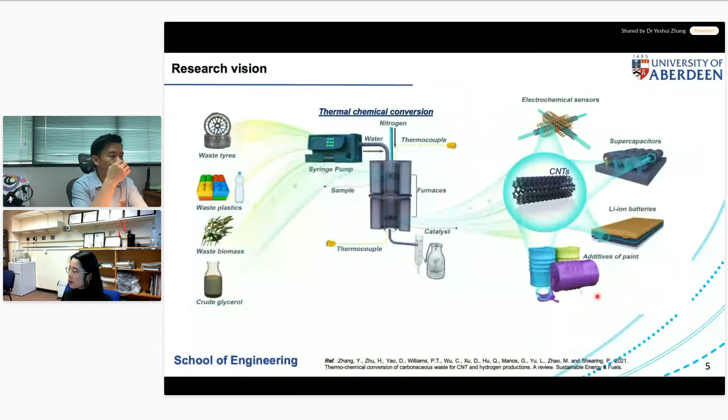Now I'm going to start with some of my research. In general, I do waste management. I handle all sorts of organic waste: tyres, plastics, biomass, crude glycerol from the biodiesel industry. Through the thermochemical conversion process, I produce carbon nanomaterials, for example, and most of the time I target hydrogen-rich syngas. I develop the process and also the reactor.

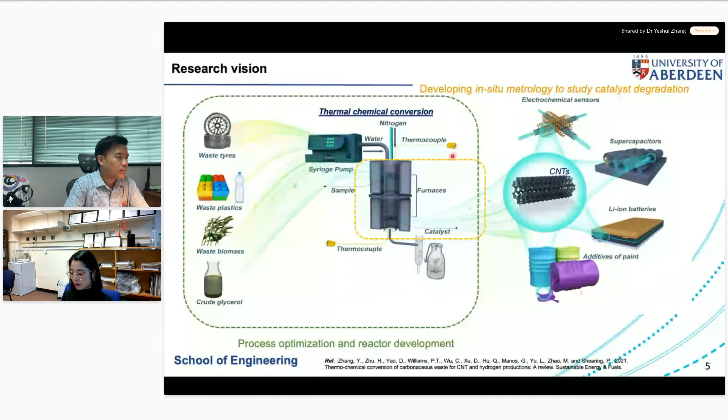Meanwhile, one of my favorite parts of my research is to develop in situ metrology to study catalyst degradation and other sorts of in situ metrology development. That's the main topic for today. I also seek applications for the products I produce from the waste feedstock, particularly the multi-walled carbon nanotubes. I try to use them, for example, for the anode side of lithium-ion batteries or as conductive additives for both sides of lithium-ion batteries.

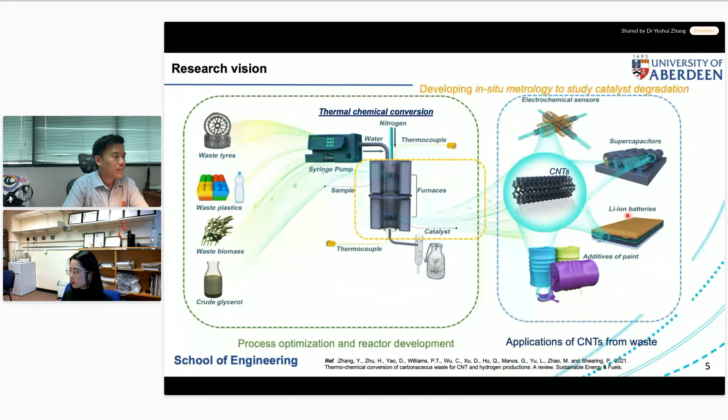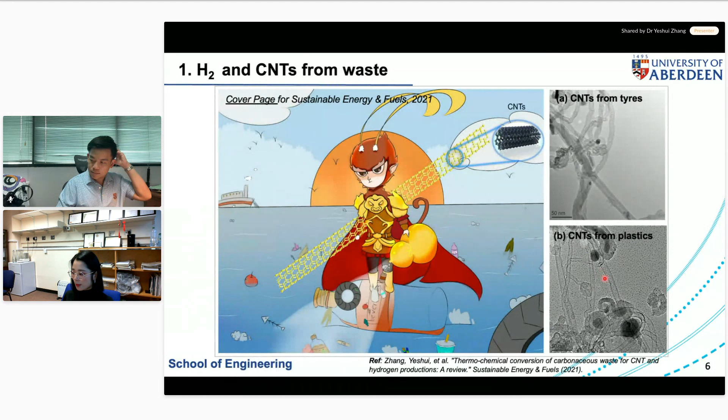The research relevant to this subtopic is funded by the European Union Horizon Europe program and also UKRI, which is a UK funder. The whole idea for this hydrogen production from waste project, the acronym is HyWay. We are targeting to commercialize this project.

That's why we do not only look at the process optimization, we also look at the potential economic benefits for commercializing this process, and try to minimize the cost and the investment, and meanwhile maximize the profits from this process to convert these problematic waste polymers into high value products, including hydrogen and also carbon nanotubes.

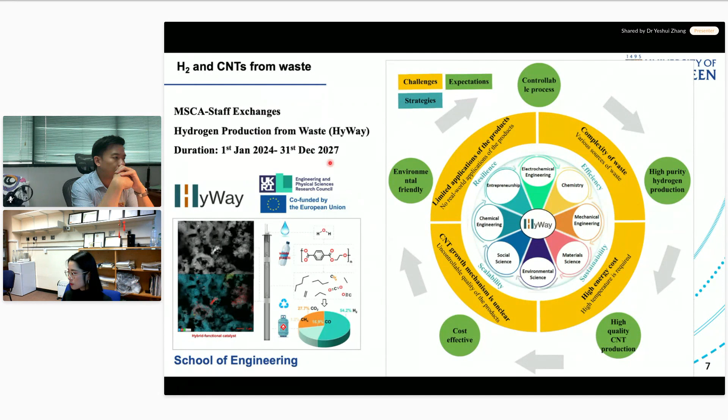As I just mentioned, I started this project during my PhD from 2014 at the University of Aberdeen. I have tried all sorts of process optimization, including all parameters and material development for the catalyst design, and also the modification of the reactor. I'm not going to go into the details, and all of this work has been published. If you're interested, you could go through the details of these process optimization results.

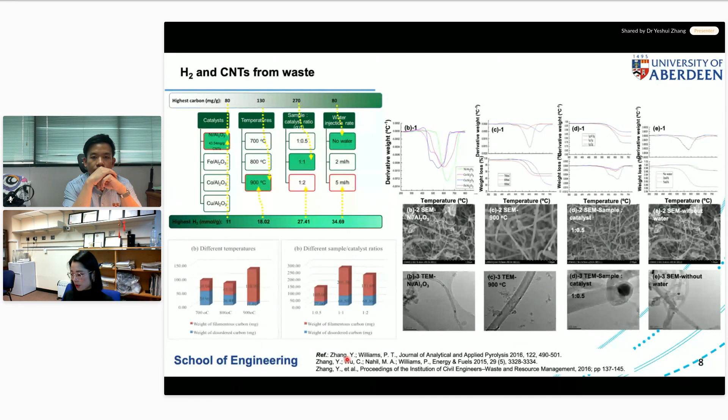What I can confirm is we can definitely produce high quality carbon nanotubes. Meanwhile, we can try to maximize the hydrogen-rich syngas production in the same process. One of the challenges for commercializing this project will be the carbon nanotube growth mechanism. Why? In general, through the thermochemical conversion process we have to use a catalyst, and carbon deposition on the surface of the catalyst is one of the major issues that degrades the catalyst.

So researchers try to either develop a type of catalyst that is resistant to carbon formation, or understand how this carbon is formed on the catalyst. Meanwhile, we can convert this problematic carbon into high value carbon nanotubes. That was my aim. So I try to investigate the growth mechanism from this process and see how these carbon nanotubes form.

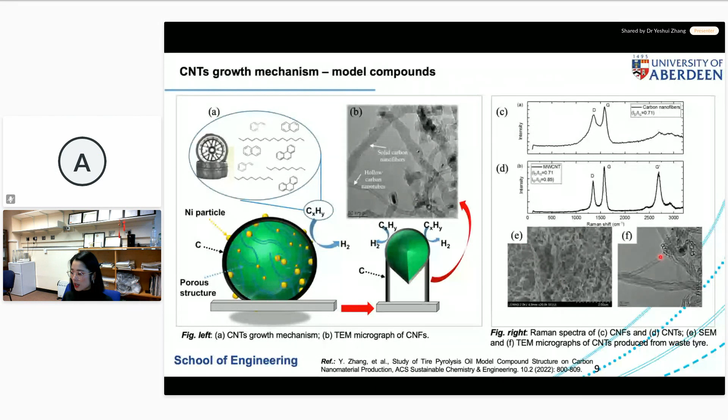On the right-hand side, we use Raman spectroscopy to confirm the quality of the CNTs produced from this process. I'm sure some of you have been using Raman spectroscopy. It's very powerful equipment to help us identify amorphous carbon and graphitic carbon in the mixture of these samples. And we use scanning electron microscopy, like figure E here, and transmission electron microscopy to confirm the production and the quality of the CNTs we produce.

Regarding the latest research on the CNT growth mechanism, as I mentioned, this is one of the biggest challenges. I have discussed this in my review article. We have to use the most advanced in situ instruments, or alternatively, we can develop in situ metrology to help us understand the mechanism. Why? Because this is a dynamic process.

The formation of these carbon nanotubes on the catalyst surface can happen immediately, as long as the carbon atoms released from the plastics reach the catalyst support. If you look at these TEM images, they were captured using in situ TEM early this year at the Diamond Light Source, a synchrotron-based facility.

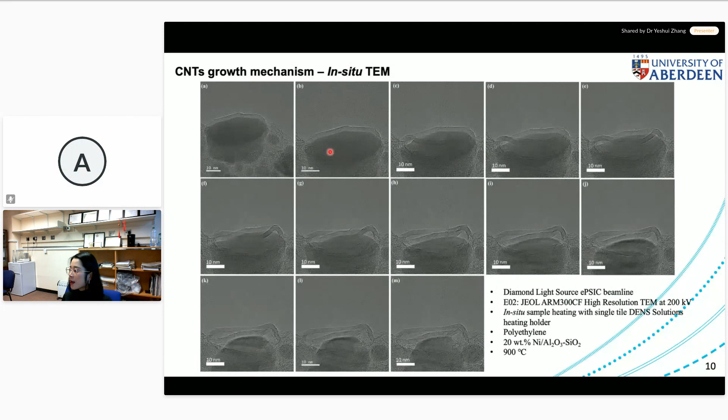And what we captured, everything happened within a minute, even less. And what we try to simulate, not really simulate, we mount the catalyst powders and the plastic powders in the capillary tube, and we do have the heating stage. And meanwhile, we use the fast capturing function of this in situ TEM to capture this particle.

So that is a catalyst particle, and on the surface, in the first image we captured, we can really see the carbon atoms being formed on the surface of this catalyst particle. And later on, you can see this layer has been growing up. And later from figure C over here, you start seeing some structure of these hollow carbon nanotubes. And this tube is being extended in such a way until we can see the length.

The diameter has been fixed because, based on the published work, the diameter of these carbon nanotubes will be dominated by the size of this catalyst particle, and the length, if you see, the length between the top layer of this tube and the bottom has been extended.

Well, that's some of the latest findings we haven't published yet, but from my personal point of view, I would say this is really something amazing. I was so surprised. I have been working on this project for 10 years or even more than 10 years, but this is really something not overcome yet. I'm still working on this to try to capture more of these images to see a longer size of these carbon nanotubes to confirm and propose the latest CNT growth mechanism with the plastics.

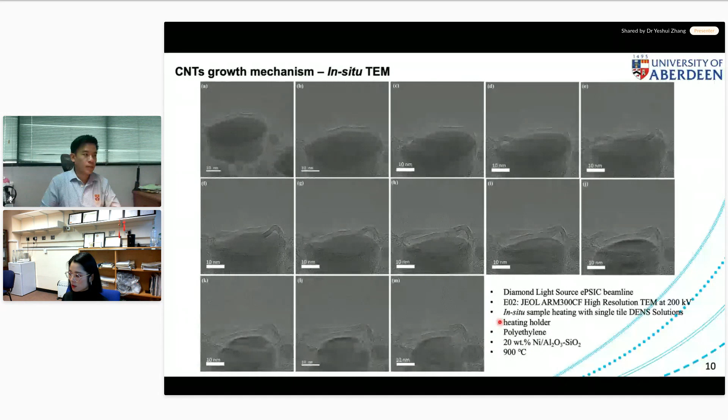Because over the last 10 or 20 years, all of the researchers refer to the published CNT growth mechanism, that is either a tip growth mechanism or base growth mechanism for the chemical vapor deposition method to produce carbon nanotubes from pure methane. But for this synthesis from waste precursors, that is too complex. We have tens or hundreds of hydrocarbons being produced through the thermochemical conversion process of the waste plastics. So the CNT growth mechanism from this process can be very, very complex.

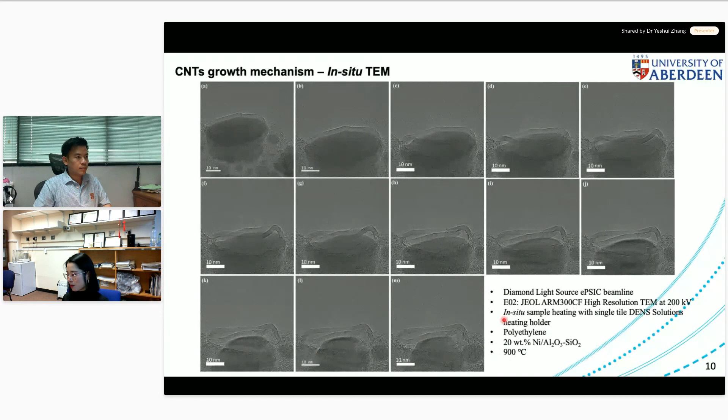And as I just mentioned, I still want to find out the applications of the CNT I produced from this process. So one of the tries I have done is to replace the anode side of lithium-ion batteries. So if you look at the structure, in general, we have the cathode side and anode side, and nowadays the anode side uses commercial graphite as an energy storage material, and it's pretty much similar to the carbon nanotube. So that is one reason I want to replace this commercial graphite.

And it depends on the country. For example, the UK imports lots of graphite from China or America. So we have to find alternative sources of this anode material. That is one of the reasons I'm doing this work. So this is a macro structure, of course, a model structure of this anode side. The pink particles represent the active material, for example, the commercial graphite, and the yellow straps here, that's a binder, and it's more like a glue. We try to connect all of these particles together.

And if you look at the small black dots here, that's a conductive additive, which is normally mixed with this electrode material to boost its electrical conductivity. And for commercial lithium batteries, we're using carbon 45 or carbon 65. That's the specific surface area of this carbon material. And all of this green stuff here is the solvent, because this model represents the drying process of electrode manufacturing. And at the bottom here is the current collector for this piece of the electrode.

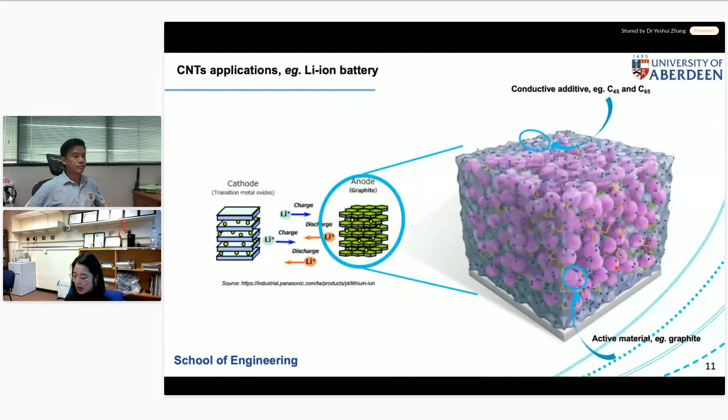Well, these results, the electrochemical performance of the CNT used to replace the graphite for the anode side of the lithium battery, have been done and published in this work with one of my visiting PhD students. I would say in general, the performance of this CNT is quite close to the commercial graphite. That is the indicator for us, and also the encouragement for us to carry on the work to use this CNT produced from waste precursors as an active material for the anode side of lithium batteries. More details you can find in this paper we published last year or the year before.

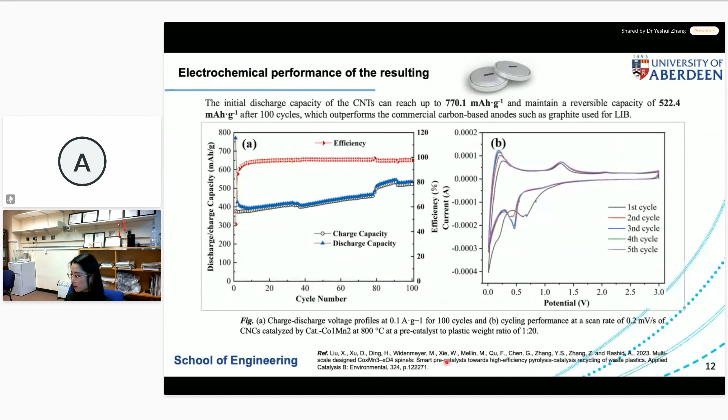Another subtopic is relevant to the advanced metrology for studying catalyst degradation. We had a nice cover page published in the Chemical Engineering Journal 2-3 years ago.

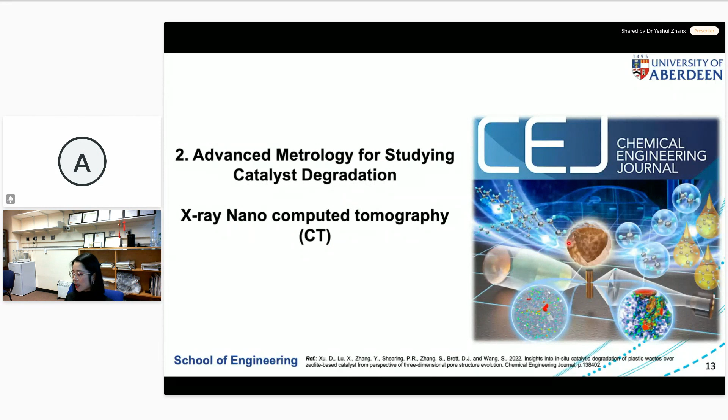And this specific metrology will be the X-ray nanocomputed tomography. I will tell you why I want to use this one. So this side of the data is the conventional scanning electron microscopy micrographs. It's a powerful and very useful technique.

We can see the surface of this catalyst particle, and in this piece of work I was using this fluid catalytic cracking catalyst, and this type of catalyst is normally used for the oil refinery industry, with a particle size between 50 to 200 microns. It's rather homogeneous. And if you look at the pristine FCC catalyst, it's kind of rough, but at least the shape is quite homogeneous.

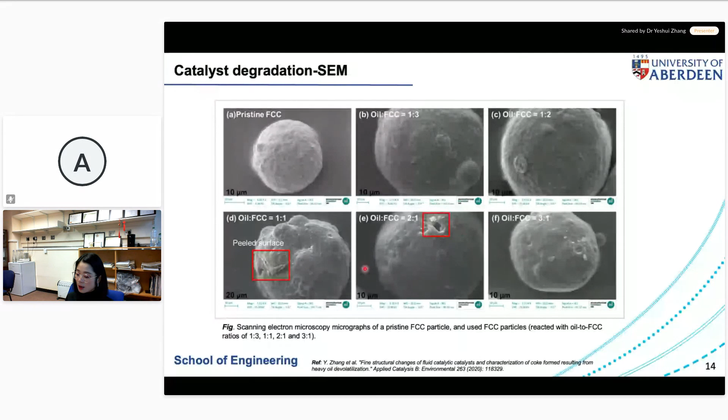And I tried to simulate the degradation process of this FCC catalyst through the thermochemical conversion process. And you look at the surface of the catalyst particle, you start seeing some of the defects, and there's something being formed, or it's just the surface of this catalyst that has been damaged by the thermal process, or peeled off the surface. It's powerful using this SEM to see the surface, but we want to identify the internal structural change of this catalyst particle.

And this FCC catalyst and other types of heterogeneous catalyst that we use have a porous structure inside. So you still want to find out what happened inside, if the porous structure has been damaged or anything goes inside of these pores to change the porosity or surface area. That is one of the powerful functions of using this X-ray nano-CT.

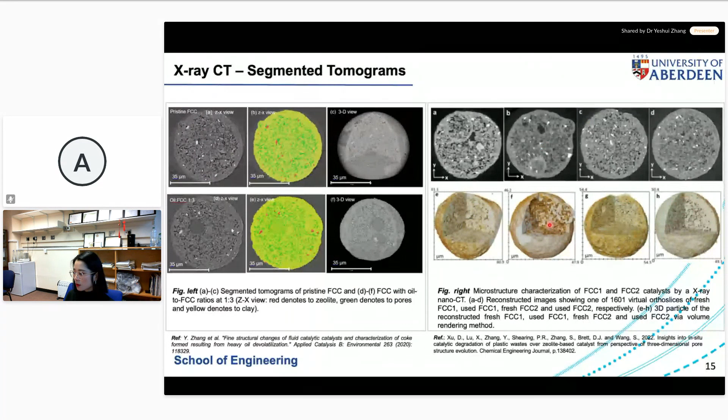So we do not only visually see the internal structure change. Doing research, we need some kind of quantitative results. That's another powerful function. What we can do, we scan the particles with more than thousands of tomograms, I mean the cross sections, and then we use the software to reconstruct the 3D structure. And furthermore, we can segment the different components.

For this FCC catalyst, we can segment the main structure of this catalyst, which is the clay, and also there's quite a lot of pores inside. That is the design feature of this FCC catalyst. And another component will be the zeolite that plays a catalysis role in this process. And if you look at this figure here, that is actually telling you the distributions of these 3 segmented components for one of these FCC catalyst particles.

And the x-axis here, 0 indicates the center of the FCC catalyst particle, and 25 is the actual edge of this FCC catalyst particle. So what we can see is the main structure of this catalyst, the clay, is almost homogeneous throughout the catalyst particle, but at the surface, you can see more of the pores. I think that makes sense because it's pristine and fresh catalyst. We haven't used it at all, so more open pores at the surface.

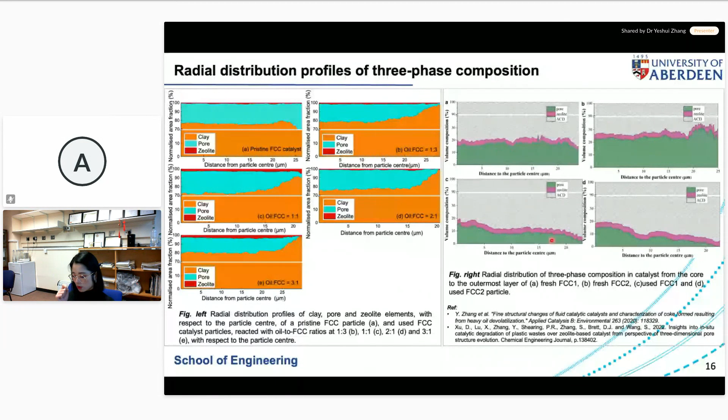And meanwhile, if you look at the red area in this figure, that is the homogeneous distribution of the zeolite throughout this particle. And the rest of the figures here are the different degraded stages of this catalyst. So to summarize, you can see the surface being blocked either by the clay or some other materials formed at the surface that block the surface pores. That's why there are fewer open pores at the surface of the particle. But there is no change in the zeolite distribution. That's one of the key findings of this piece of work. And the right-hand side figure is another continuation of this study.

Except for these different contributions of the composition, we can also segment the size distributions for one type of component. For example, the zeolite, because it provides the acidity of this FCC catalyst to catalyze the process. That's why we want to find out more information about this zeolite distribution.

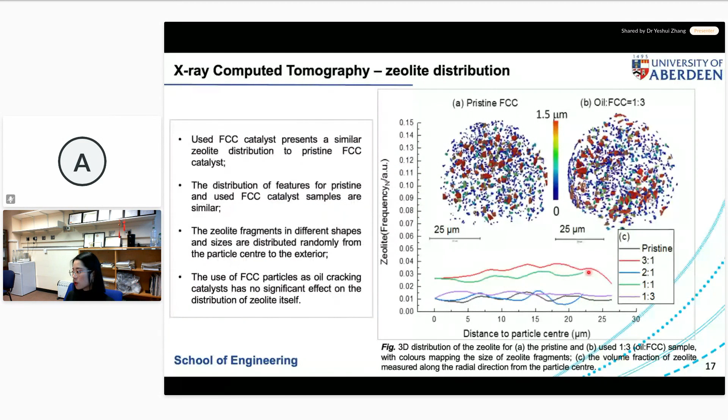What else we can do with these X-ray CT results is the pore size distribution. It's quite normal for researchers working on catalysis to use nitrogen adsorption and desorption to quantify the pore size distribution. But that is for batch analysis. Using X-ray CT we only look at a single catalyst particle, but we can still count how many pores of different sizes there are and plot these pore size distributions.

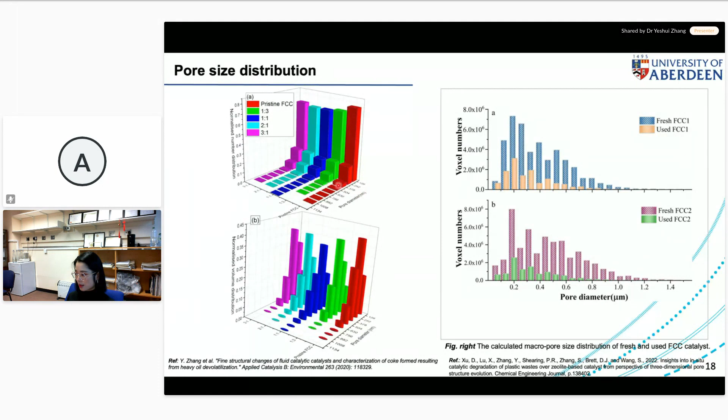Of course, by looking at one catalyst particle, you might ask me how I am going to confirm the results are reliable. Yes, I'm still doing the batch analysis, using a conventional analytical method to confirm the porosity, pore size, pore size distributions, and pore volumes for the batch of these FCC catalysts. That's the result, so we can confirm our X-ray CT results are rather reliable. I'm not going to repeat this conclusion. If you're interested, there are 2 publications, and you can look at the details from the references. And those are the 2 graphical abstracts for the publications.

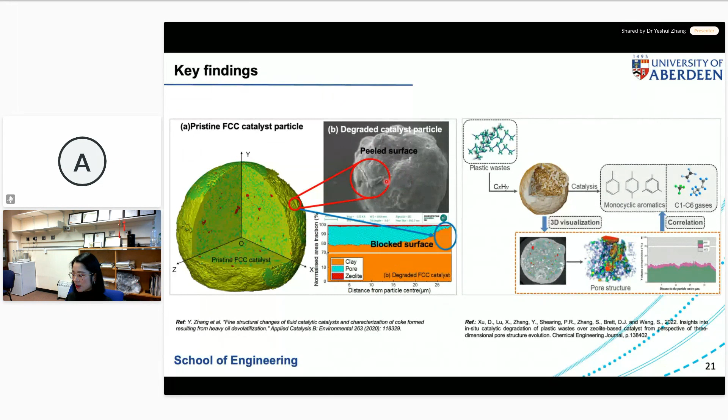Besides highlighting our findings, I still point out the research gaps, something we still need to find out. For example, the peeled surface of this catalyst. For now, it could be damage of this clay structure from being calcined at high temperature, or some carbon being deposited at the surface. We will need more synchrotron-based facilities to help us identify the chemistry of this peeled surface.

Another subtopic of my talk is the advanced metrology development for studying the lithium-ion battery drying process. I have made this model to simulate it. This is a very simple process to dry the electrode. We mix the slurry at the beginning, and then we evaporate and remove the solvent to make a compact and homogeneous distribution of this electrode on top of the current collector, in silver color here. Everyone thinks it's a very simple process, and I actually had the same question at the beginning. But later on, working on this project, I found more things, so we are not sure.

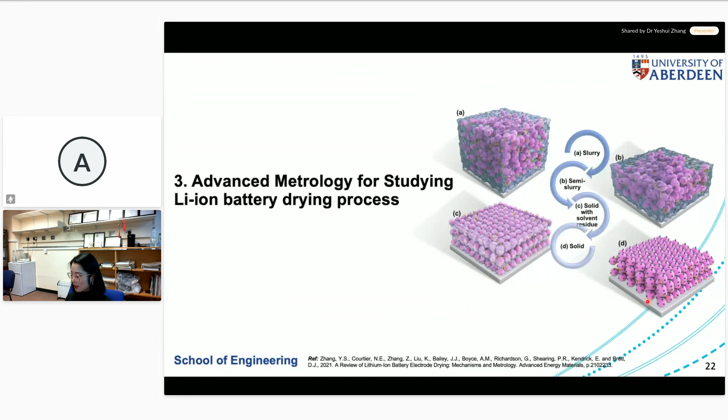For the drying process, in general, this is a lab-based process for manufacturing lithium-ion batteries. We start with making the electrode, and then cut the electrode into different styles and shapes, depending on the type of battery you want to make, and then do the formation and conditioning. Even the commercial process is quite similar; just the equipment used is different.

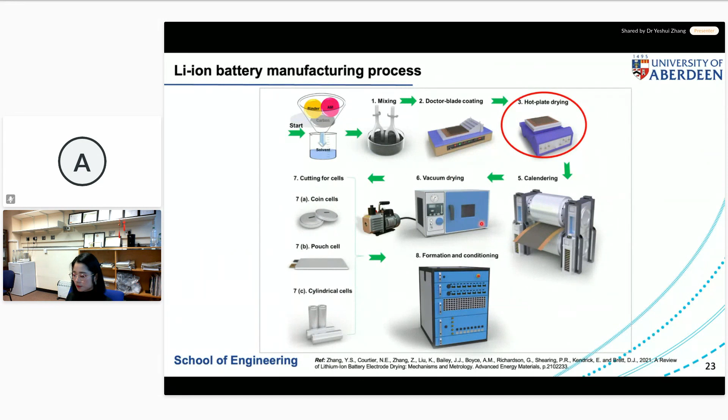As I just mentioned, I had the same question. The drying process sounds like only physical evaporation, with nothing difficult there. That's why I did a very comprehensive review summarizing what parameters or variables are involved in the drying process for making lithium-ion battery electrodes, and how these parameters affect the performance of the electrode. For example, if you dry it very fast, and this drying rate can be affected by temperature, radiation intensity, pressure, depending on the drying method, this will lead to different types of defects in these electrodes, which will finally affect the electrical, mechanical, and microstructural properties of the lithium-ion batteries you make.

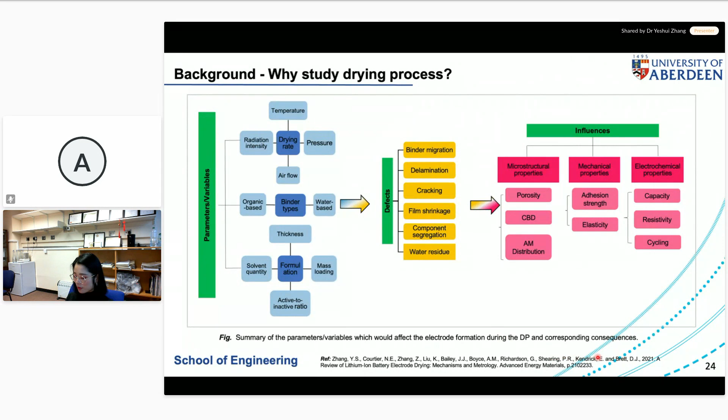If the process is too slow, we could have component segregation. Ideally, we want everything distributed homogeneously, but if you dry it too slowly, we cannot reach a homogeneous structure. And if you dry it too fast, as the solvent evaporates, it will drive the binder to the top layer of the electrode coating. In that case, you move all the binder to the top, with less binder at the interface between the current collector and the coating, so you get delamination of the coating and other types of defects.

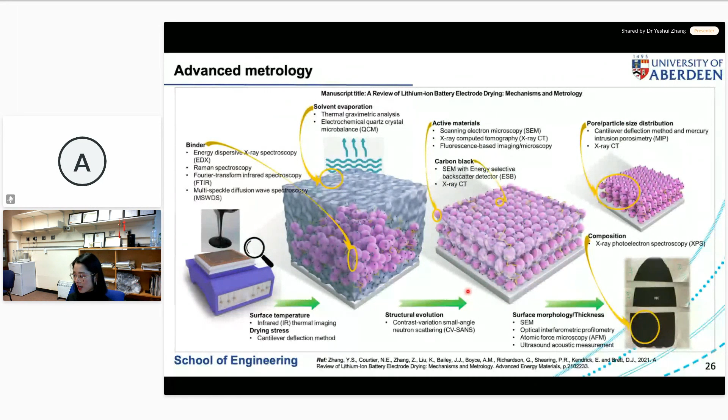And that is another highlight from my review articles, to see what type of metrology we can use to help us understand the different drying stages and the drying mechanisms. In that case, we want to control the drying process. Of course, I have tried everything, like in the previous slides. I have covered many of the characterization methods, and I have tried most of them to see what kind of useful information they give.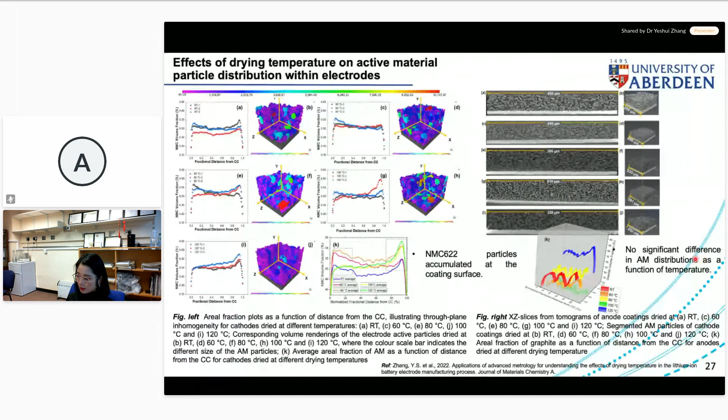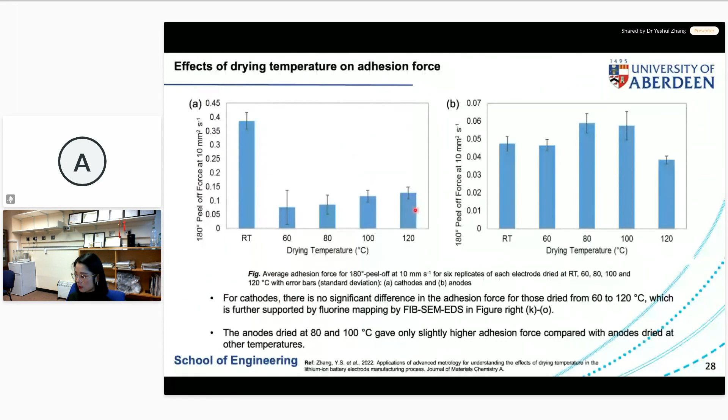For example, using X-ray CT. This is not actually nano CT, it's micro CT, to help me see the 3D structure of the electrodes, the composition distributions of the electrode layer, and the thickness of the layers throughout the drying, for example. And also other types of characterization: I tried to see the adhesion force between the electrode coating and the current collector, and also FIB-SEM.

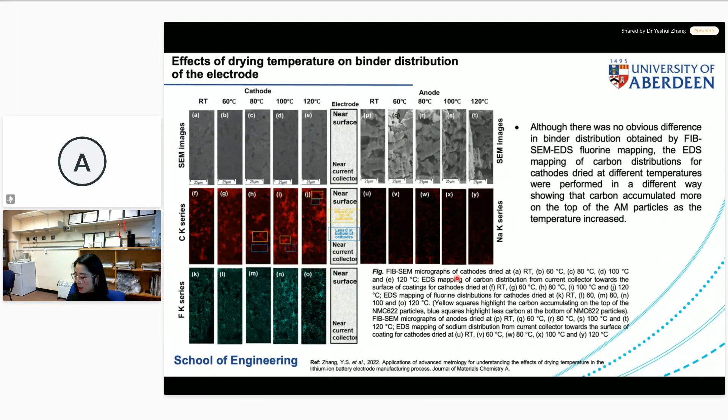I was using it because the SEM has higher resolution compared with X-ray CT, so we can see more of the microstructure of the electrode materials we made, and how the drying temperature affects the component distributions of the electrode throughout the layer. Of course, all of these electrodes I made at different temperatures, or in the other way, we can see how the drying speed controls the quality of the electrode.

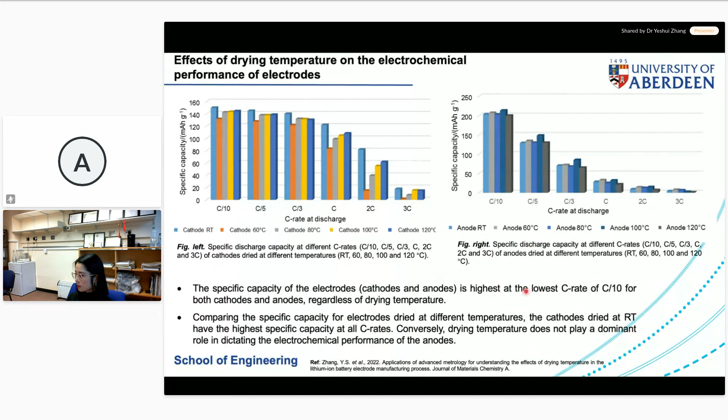I have tried to confirm the electrochemical performance of these cells. I made all of these electrodes into coin cells and tested the electrochemical performance, and the result is rather clear for us. If you dry too fast, of course, the capacity will be reduced and the cycling capacity will be reduced as well. As a conclusion from two or three of my papers, I'm going to skip this slide.

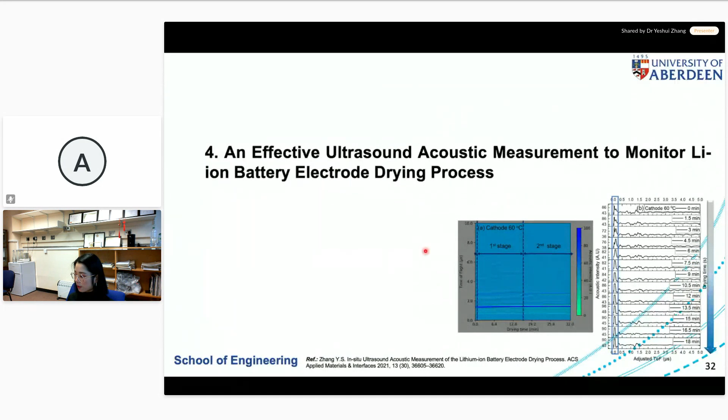So I have grouped all of the metrology I have reviewed, depending on the capability for analyzing the materials, the electrodes, or the battery cells. I have also grouped them in a different way, to see if the equipment, for example AFM, is capable of in situ experiments to help us identify the dynamic information of the drying process or not. Some of the methods have been used in other fields but not yet in the lithium-ion battery field, but still have potential to be developed as an in situ tool to identify the dynamics of the electrode drying process.

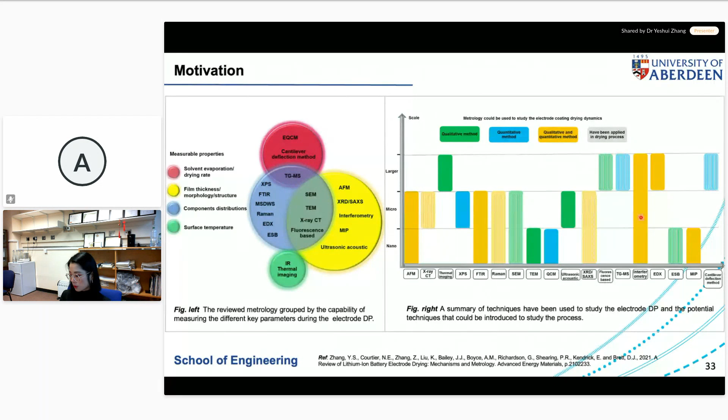So that's the result. After doing that, it's very clear for me. I reviewed this list of different methods I can use to carry out this study, I tried them, and I identified the capability of the different metrology. So there's a gap, definitely a gap. We need something with a very simple design that provides very fast results or readings to indicate if the drying is too fast or too slow. We can adjust it meanwhile to reduce waste or eliminate any defects when drying these electrodes.

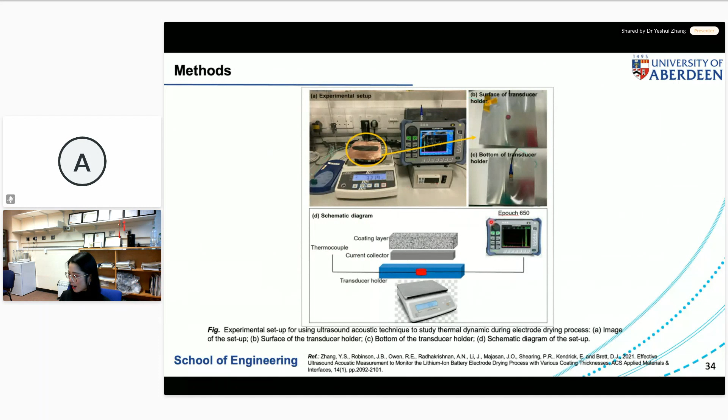So this is the acoustic tool I developed. This is actually a second generation. The principle is very, very simple.

It's just based on the responsive mode of these acoustic signals, and we use the same transducer for emitting and receiving these signals. And this change of the signals provides me the different information between the interfaces.

For example, in the drying we have several different types of interfaces. It's a solid and a liquid. The solvent is a liquid, and this active particle is solid. So the number 4 interface is a solid and liquid interface. And also there's a current collector, CC, and between the solvent is another type of solid and liquid interface. And if you have this active particle, like the number 5 interface, the particle between the CC, that is the solid and solid interface.

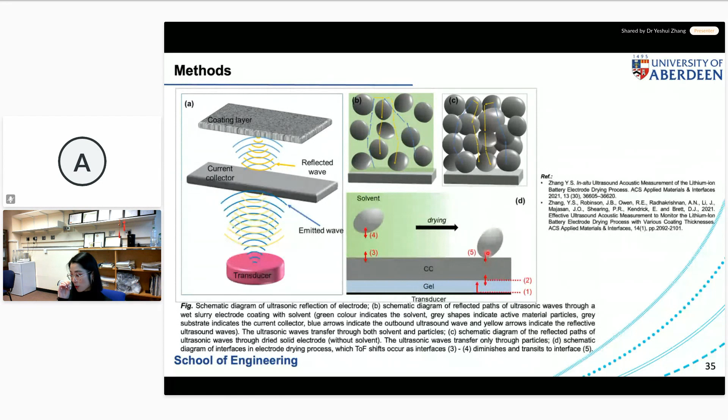So by interpreting the received acoustic signals, we can tell the stories of the drying, and in that case, we can really adjust the drying process. And well, the tool itself provides us rather fast readings. But for interpreting the results, we need lots of baseline investigations. I'm going to skip this.

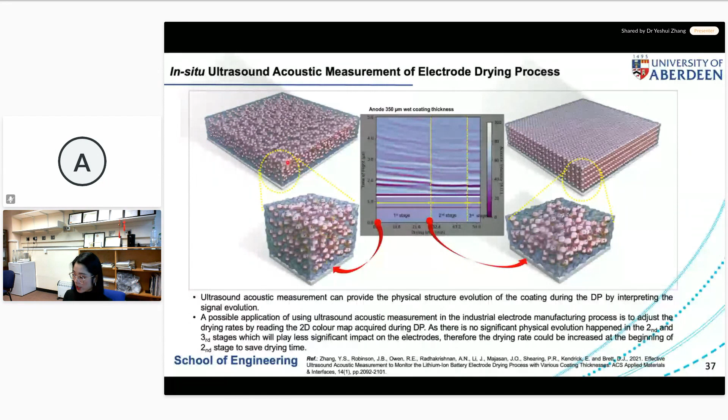And in general, what we can do, this is like a graphical abstract. So by using my in-situ acoustic tool, we could capture this color map immediately, within less than a few minutes. We can have one of these color maps, and it tells us the different drying stages. And by interpreting it using the coding I designed, I could really read the drying stages of these electrodes.

Therefore, we can see this drying is too fast, and we can change the setting of the drying immediately to control the drying process and try to optimize this, rather than drying and wasting a lot of raw materials and then going back again to optimize the process. We can eliminate all sorts of this waste and optimize the drying process.